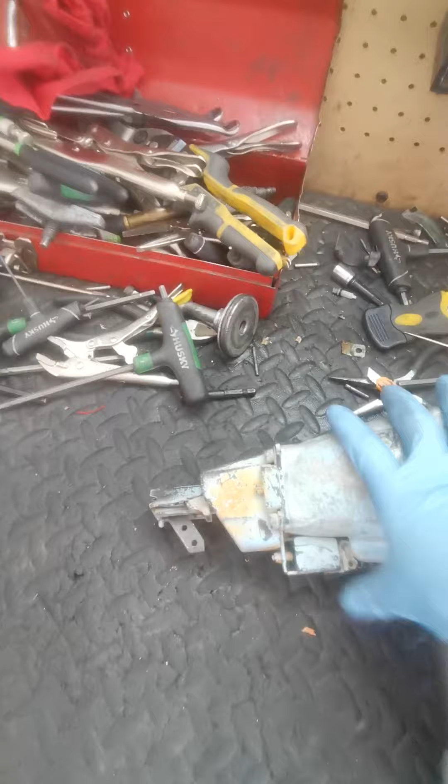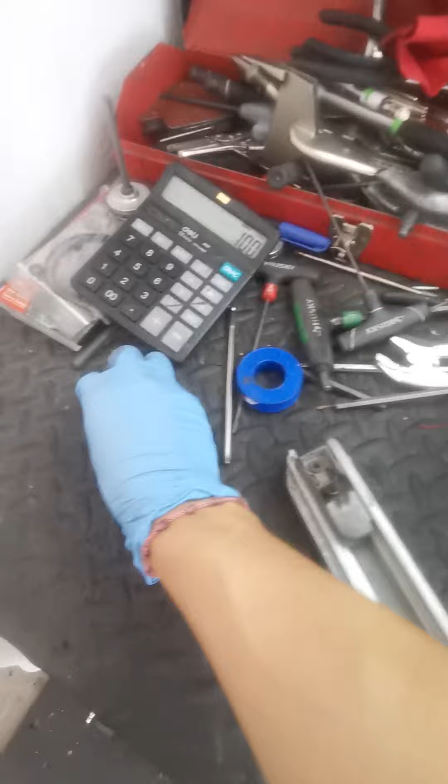And also, there's some missing ball bearing. This special piece goes right there, holding the magazine onto the nose. A few other pieces, some springs, some bolts missing here, and well, hopefully it works again. That's the only purpose we're trying to achieve on this gun, but it'll be done, I promise.

So keep in touch. I'm gonna tear it down. I'm gonna take it all apart, and then you'll see what we're gonna do.

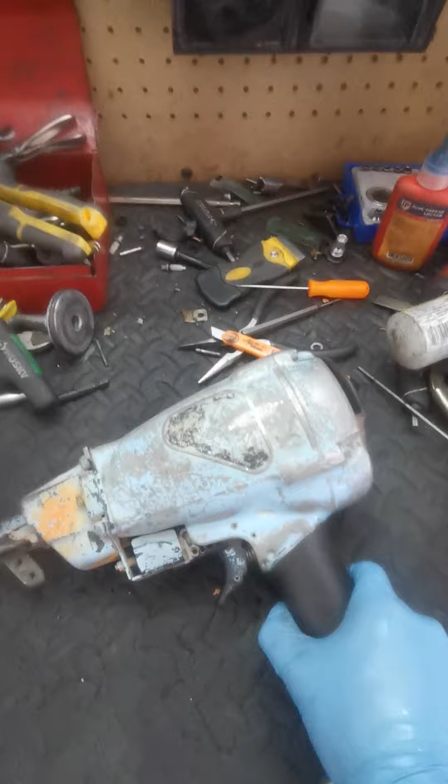Just give us a call, and I'll see what I can do on this gun. Hopefully it works again. Hopefully, because I'm not sure about it. It's in a pretty bad shape, but let's just hope for the best.

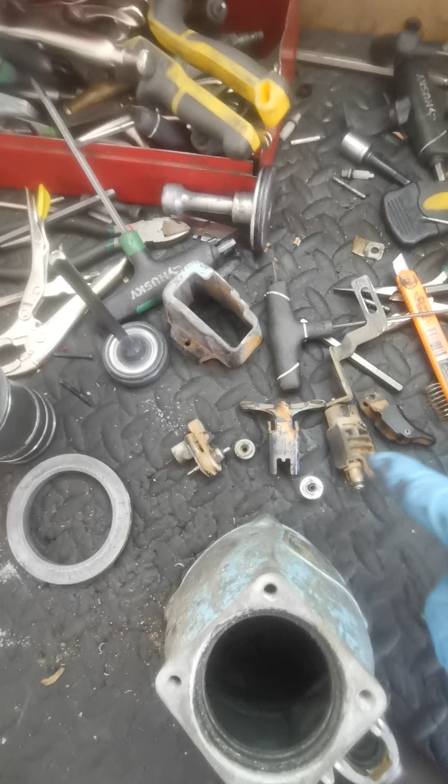I've removed all the internal parts and all the trigger bulbs, as you can see right there. Just for you, if you're doing this at home, you can also take pictures of what you're doing, so you make sure you assemble everything back the same way it was before you tear your gun apart, to make sure you're installing everything the right way.

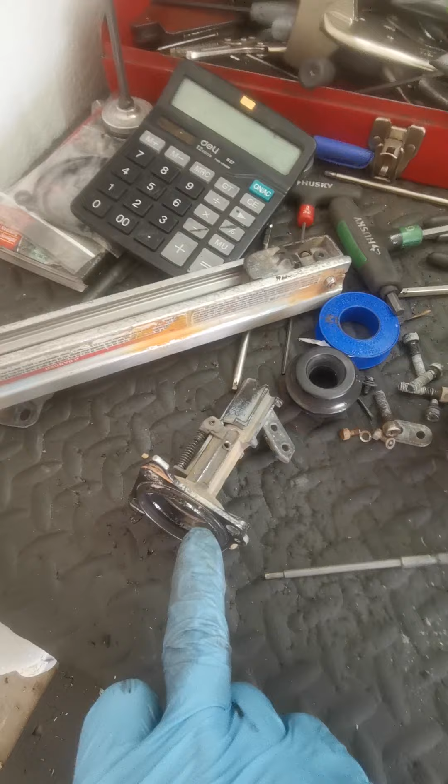I think on this model they use O-rings, so there's an O-ring on the nose, actually right there. I think the O-ring that seals the cavity between the cap and the body is also included in that kit, so probably I'll replace that too.

As you can see, it's pretty dirty, so I'll clean it up. All the main parts, collar, cylinder, pretty dirty. I'm gonna make sure everything is fine, and all the head valve and O-rings.

As I said, on the Metabo parts, you'll find all this set piece by piece. Metabo does not sell kits, so it'll be hard for you to find all the parts, even to get the parts. This is the upper valve assembly.

You find some pins, some clips, some O-rings, roller pins, this bracket, the braces, also some springs inside. So that's what I use the Senco kit to rebuild these nailers.

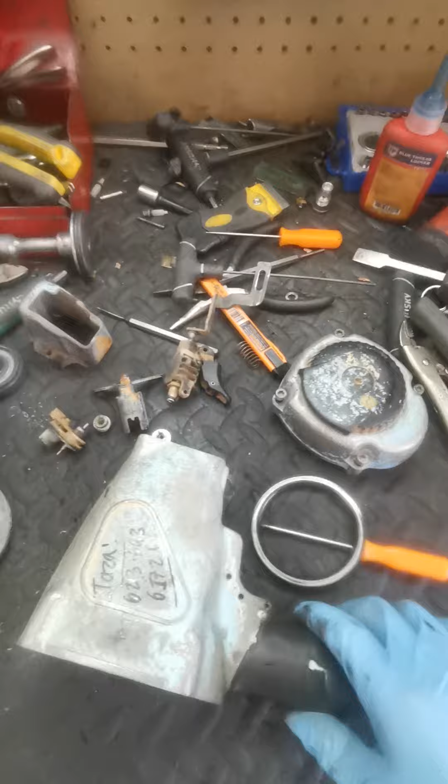It's cheaper and it's the same, it works good. The only difference is this part - they don't have this ball. There's also a spring right here. They've got some like pre-punched pin, that's all, but it works the same.

This kit also includes these bolts, these 4 bolts. So as I'm installing all the O-rings, probably I can also install everything that's in this kit. So let's clean it up first of all.

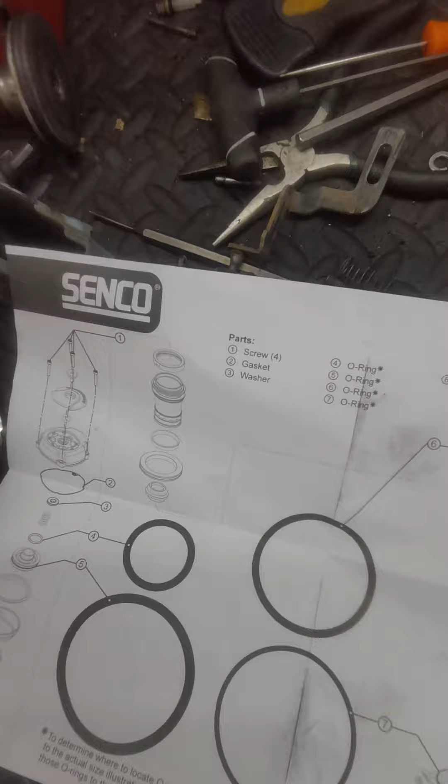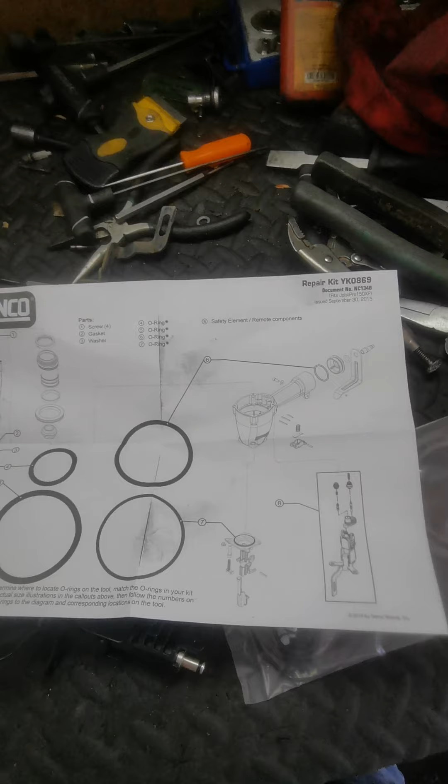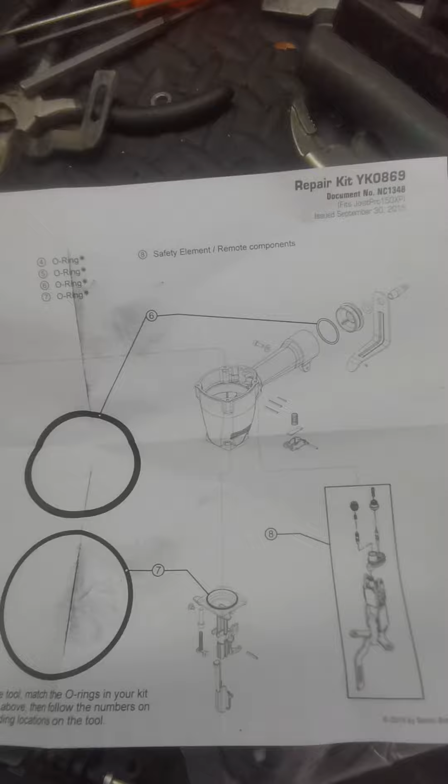Well guys, so this is the kit that you will need from Senco to repair this gun. This will work on the JoistPro 150XP from Senco, but also on this NR 38 AK from Metabo or Hitachi. There's also a model that uses the same parts from New Tools, but I just can't remember the model they have. You can see that's the kit number.

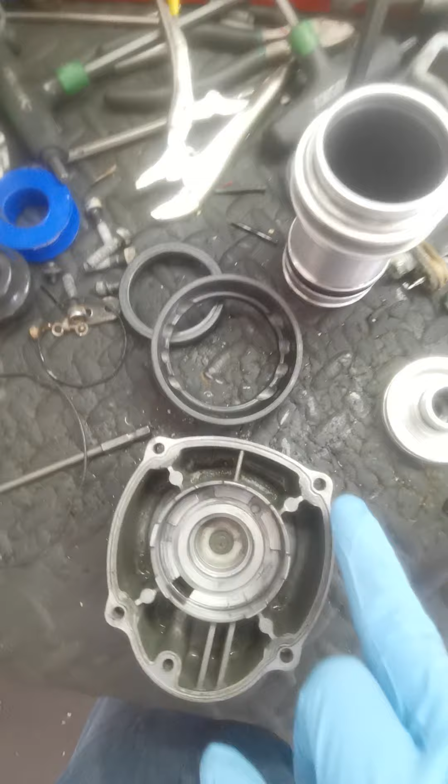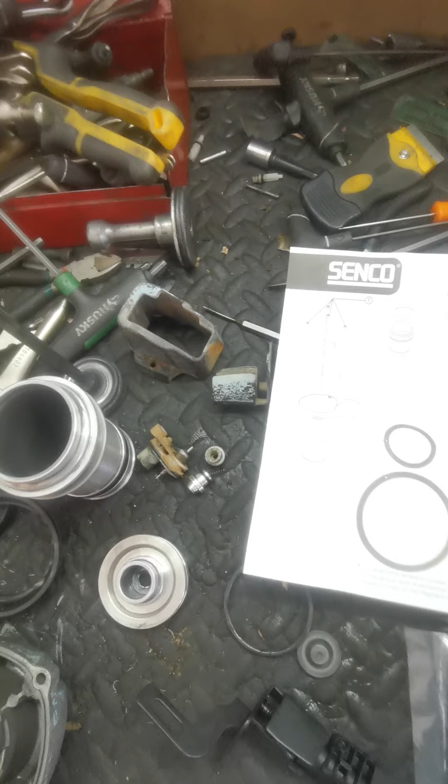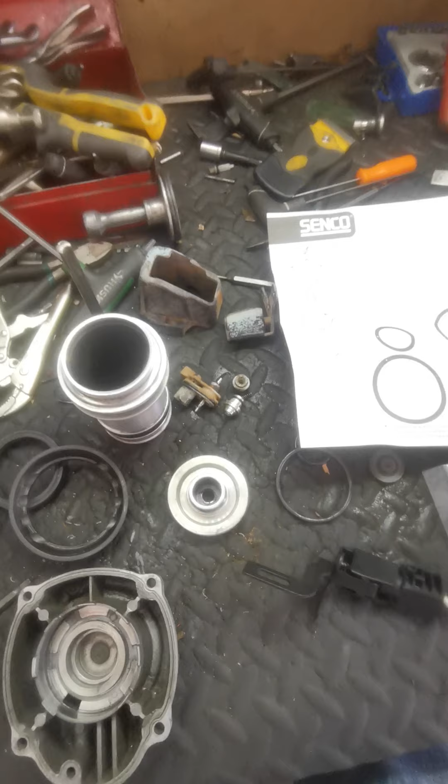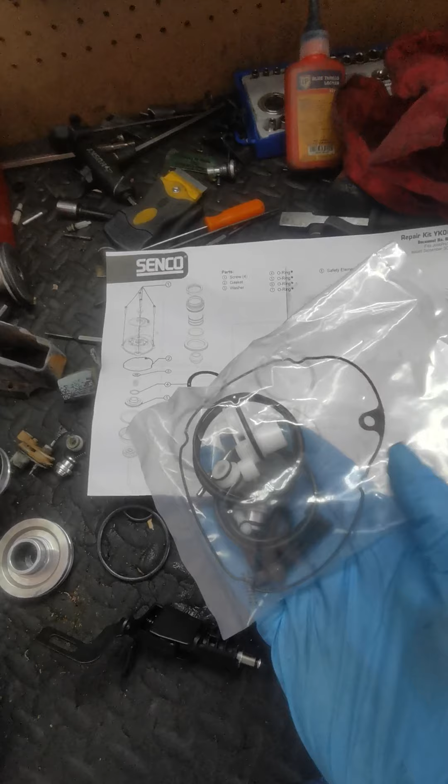We got, as I said, the bottom O-ring, the one that goes on the nose, and we also have an O-ring around here. It's not a gasket, it's an O-ring. The two O-rings that go around the head valve, right there. And the 4 bolts, and also this thing goes right there. It's called a deflector, but other brands like Metabo or Hitachi call it a bumper or rear bumper. And everything is right here - all the valves, the rest of the O-rings, all the springs, the bolts. This is the whole assembly, same as that one right there, as you can see.

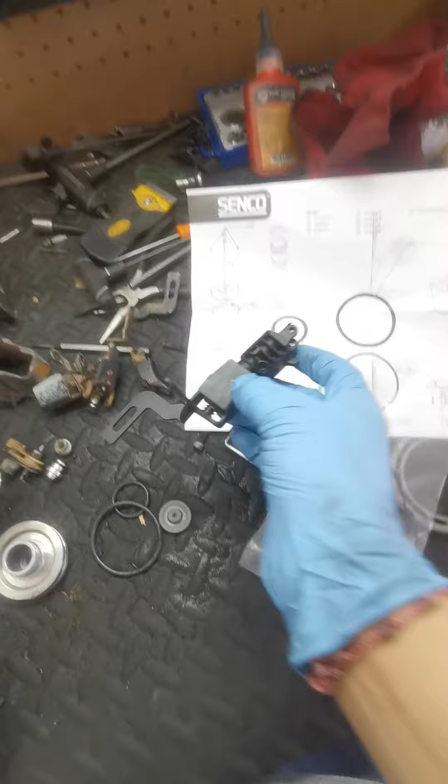Let me show you the only difference that I told you about. We don't got the bolt right there, but it works the same. Okay, this is the set.

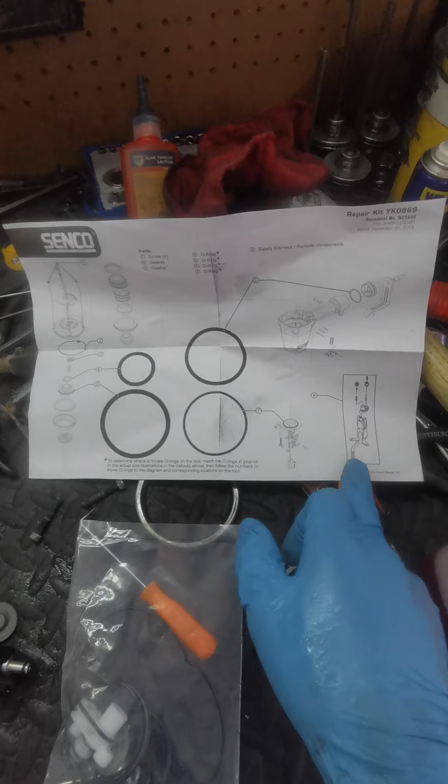Well, not all the O-rings are on this kit. We don't have the rings for the cylinder or this collar over here, but they're good, so we're not replacing those. I'm just gonna install all of these. There's like a manual, so you can know what you're doing. As I said, I hope for the best.

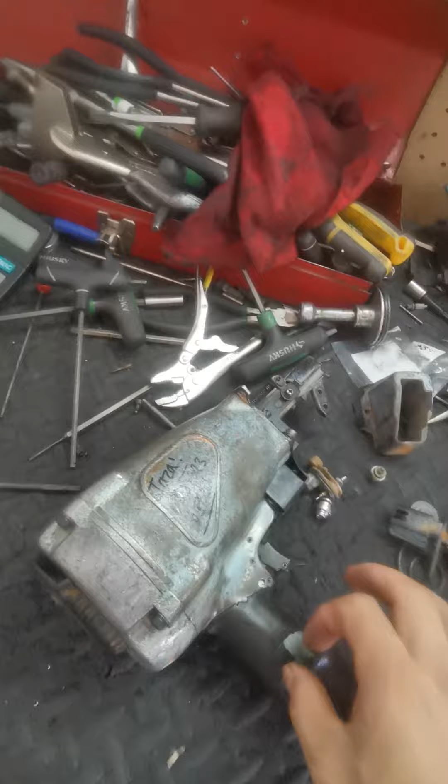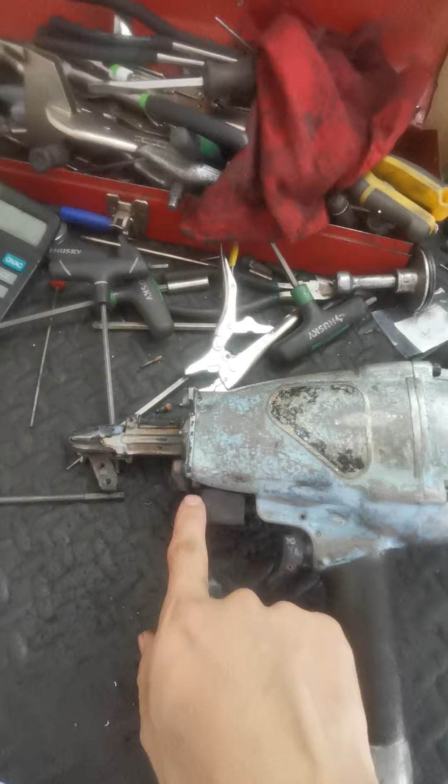Okay, I'm just gonna try to fix the magazine. Put some bolts that are missing, pins and springs, a few bolts, and that's it. So we're ready to go. Everything is brand new, everything that was in this repair kit.